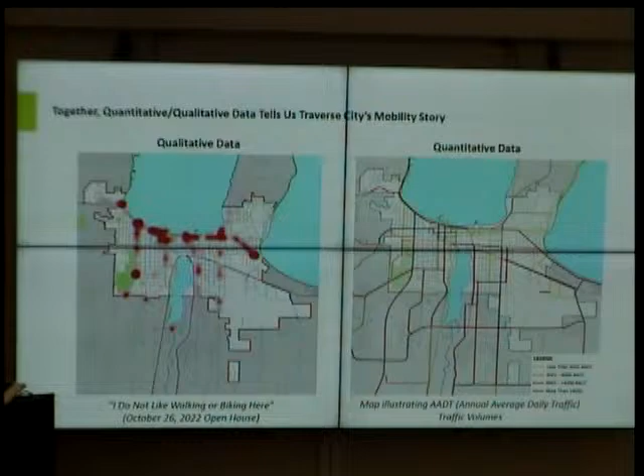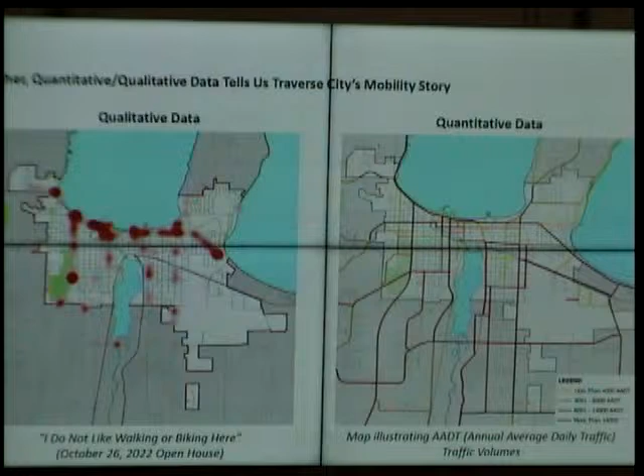Briefly, a recap of the process that went into developing the network map. We used qualitative data as well as quantitative data. We showed how public feedback was translated into a document that created the dots on the map, and the darker the dots, the higher the number of respondents. On the quantitative side, we added a legend showing different volumes of traffic—the darker, the higher the traffic volume, according to the MDOT annual average daily traffic. Using that qualitative data along with the quantitative data we gathered, we developed the proposed network mobility map. There were quite a few inputs to this.

If I may, real quick—is everyone familiar with Hawk and RRFBs? No. Okay, so the Hawk signals are what we have along Grandview Parkway. You hit a button and the flashing red lights begin, so vehicles have to stop for that. The RRFB is a rectangular rapid flashing beacon—we have those in a few other places, like on 8th Street. They work better in some contexts than others. On 8th Street, people are pretty good about stopping for them.

It's become habit. But the one across from the library where the trail crosses by Sigmaw Gardens—I think the context of that street makes it not as effective. The city has been spending probably a year and a half looking at ways to improve it. There's a lot of limitations because the railroad right-of-way is right there, so what you can do becomes a little more challenging. But those are the two differences: it's not regulatory like a Hawk where you have to stop, it's just telling you and bringing attention. Now, if a pedestrian is in the crosswalk, then you do have to stop. Great description. The Hawk, as you said, is regulatory. The formal term being used is a pedestrian hybrid beacon, but the slang term Hawk is commonplace.

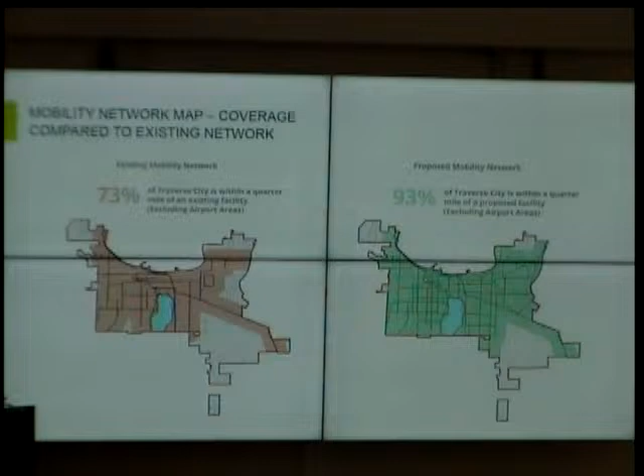It might just be an asterisk at the bottom, but being within a straight line distance—a quarter mile—doesn't necessarily mean, even if you're equating a quarter mile to a 5-minute walk, that people are within a 5-minute walk of that distance, because there could be fences, private property, or some other barrier that impedes access. Good comment, that's correct. This is more 'as the crow flies,' I believe is the term. There are segments that may not be within that walking distance or straight line walking distance. We can caveat that with a statement.

In implementing the bike mobility network map by taking a non-prescriptive approach, the plan provides a menu of options and facility types, and a decision-making matrix to support implementation. This allows us to select the right treatment type given the right context and community feedback. We need to answer: how many dollars do we have available? What other components are going into the project? Are there other agencies involved? So that we can get that holistic picture of what the appropriate solution is at any given time.

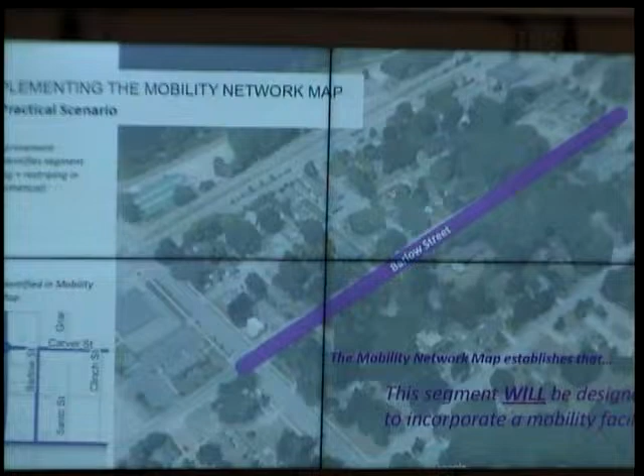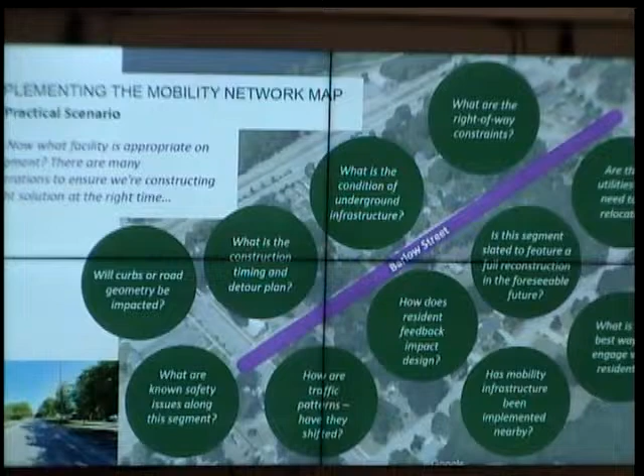So I tried to put in a practical scenario, thinking about Barlow. We look to the map—Barlow Street is identified in the mobility map for implementation. If we were to move that forward today, there are lots of questions, and we just put up a few here. Similar to what I mentioned earlier, are the curbs going to be impacted with the proposed design? We can't answer that today—we don't know what that improvement project is. The scope is yet to be defined.

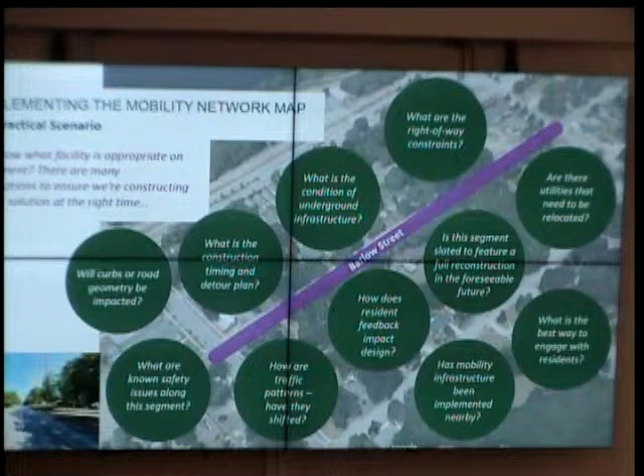What is the construction timing and detour plan? How is that going to work with other construction projects, say if this was planned for 2020? What is the condition of the underground utilities—is it time for those to be replaced? What are the right-of-way constraints, and other impacts to right-of-way that would need addressing? Are there any known safety issues in this segment? Maybe it's something that currently isn't reported in the UD10s, but would be gathered through community feedback.

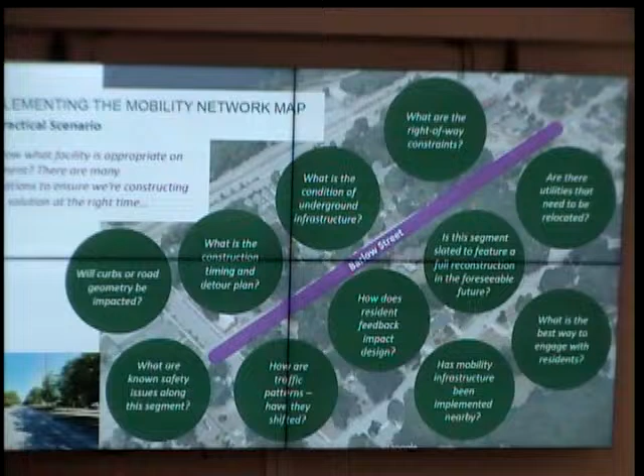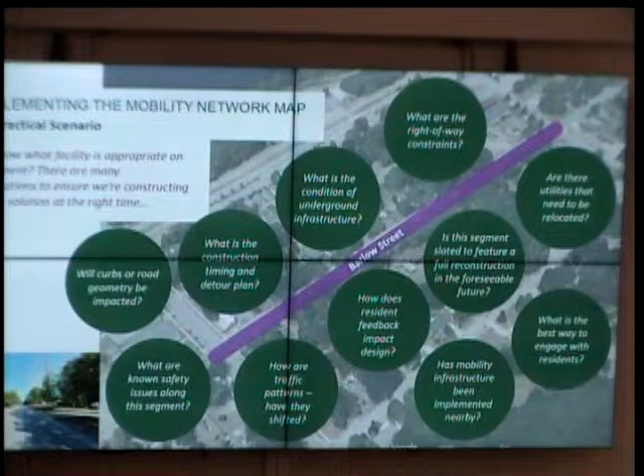How are the traffic patterns going to exist, and do we have the answer to that? How does resident feedback impact the design decision and facility choice? Has the mobility infrastructure been implemented nearby—does it connect to something already, an obvious extension of the next project? What is the best way to engage with the community? There's a plethora of questions we don't feel we could answer by going with an overly prescriptive process, that we feel would be appropriate when the project and scope are identified.

So this is kind of that summary of going through the process: understanding the current conditions of the road, evaluating our options within the matrix, and then selecting the right facility given the right constraints.

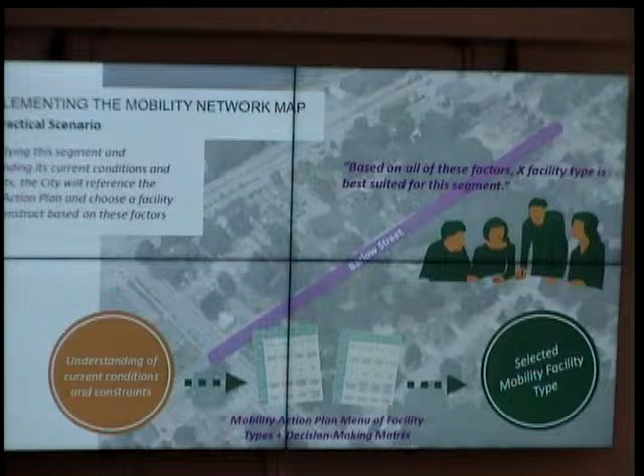In implementing the mobility network map, it's going to take time—we're building an entire network. This is a living plan that is intended to be used routinely throughout the year, engaging with the capital improvement process and the newly created and implemented design team.

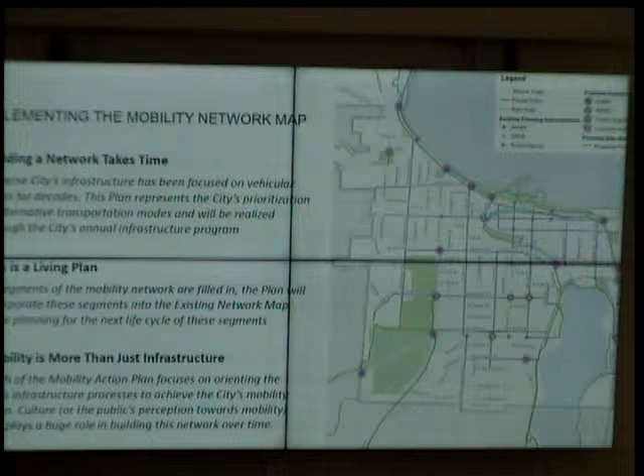We also recognize that mobility is more than just infrastructure. There's a culture, an expectation, a community of mobility that needs to be recognized and encouraged. Frankly, the more people use the facilities, the more we expect people to use them, the better we can have accountability and expectation of the other modes as well.

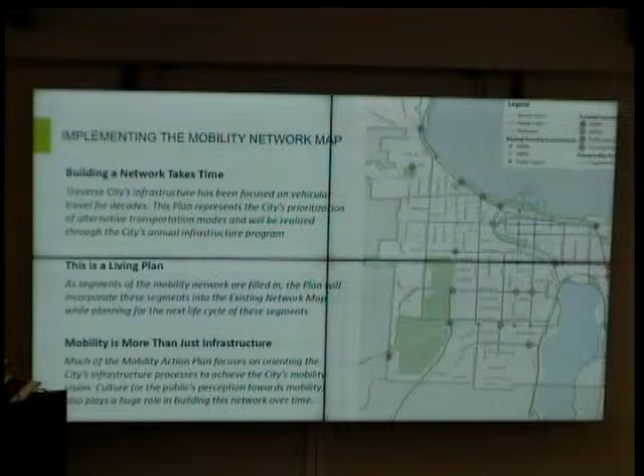All right, so this gets us back to, like I had said, the end in mind. Here we are back to that network map in particular. We can reference this, but we also have the plan loaded up that we can go to any specific page that we might have some feedback on.

Thank you. First, I'd like to say a big thank you to staff, to the mobility leadership team, to our consultant, and to every person in Traverse City that came to these various public meetings and contributed. Writing these plans is very time-consuming and difficult, so I want to thank everybody involved in this process.

But I want to open it up now to questions and comments. Everybody has read the plan, I'm hoping, and are there questions and comments on it?